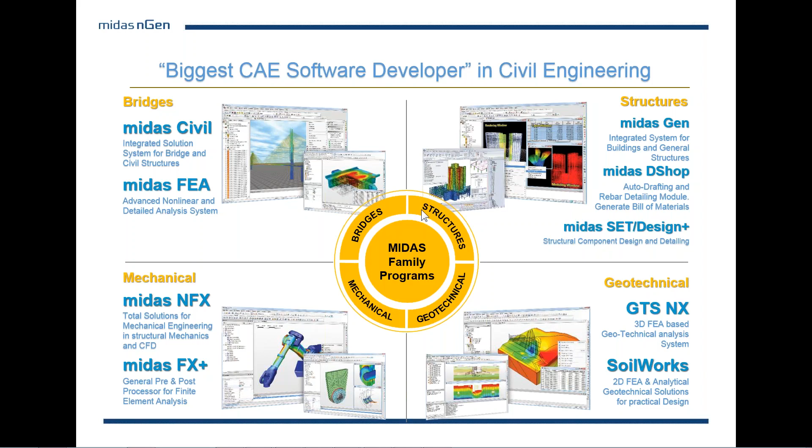Let's go ahead to the Midas nGen introduction now. Midas nGen is the next generation solution for building analysis as well as design. Basically, Midas nGen consists of the analysis tool, the design tool, as well as the drafting tool - it's a one-stop solution for buildings and general structures.

We start with architectural drawings, which are integrated into Midas nGen software. We can create a model easily using those drawings, and after that perform the analysis. There are a lot of automated features in Midas nGen that can be taken advantage of. We have optimized design solutions, and high quality reports can be generated, including quantity takeoffs like bill of materials, as well as structural drawings. So we basically start with a drawing and complete with a drawing, making Midas nGen an all-in-one design system.

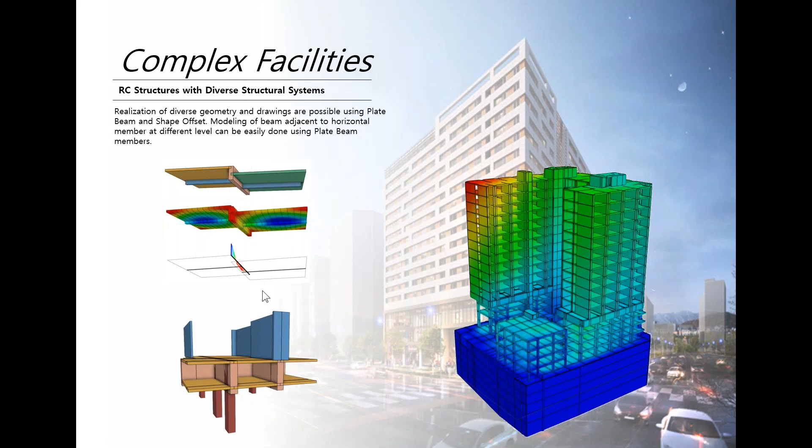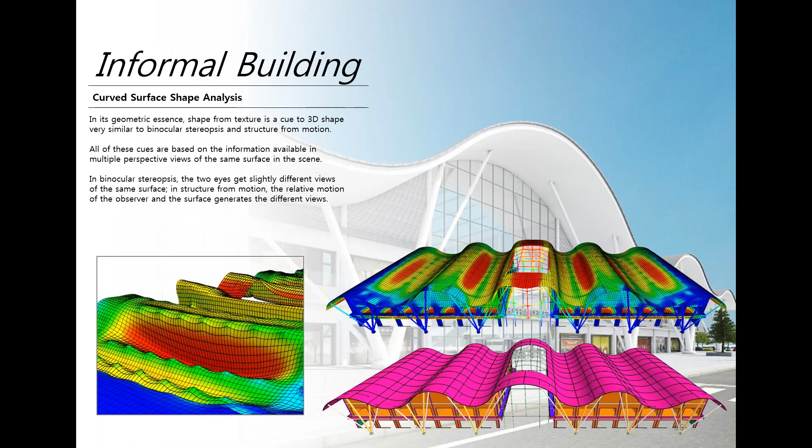Multi-towered structures can also be modeled, where each tower will have its own diaphragm. Then there are informal buildings, as you can see here, with shell type elements, and the modeling is quite corrugated. We can easily model that using automated modeling features. Again, here we can see a shell member analysis performed of a cooling tower in Midas nGen.

So not just RC, but also in the field of steel, we can see steel frame design. Optimization is also possible in Midas nGen.

Let us go ahead now to the demonstration. I would like to show you how Midas nGen can be utilized easily. So let me go to the Midas nGen software solution.

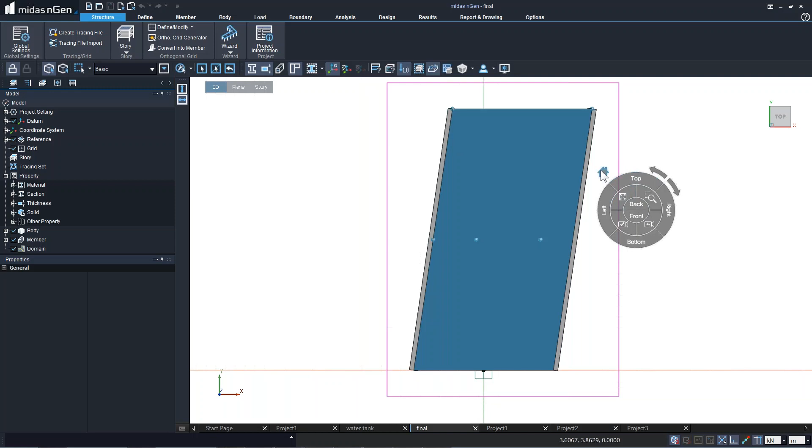We can access the different viewpoints by clicking on the second button of our mouse. So it's very easy to go to any view at any point in time, wherever our cursor is. So that's about the user interface.

This was another session where we had seen how a big model or building model was easily modeled in Midas nGen. Today we are going to see how to do the modeling using one of the modeling features in Midas nGen, that is the tracing of architectural drawing.

In Midas nGen there are various ways in which we can create a model. I'd like to briefly explain those different ways. Let me first save the model file before I continue. We have an autosave feature.

One of the modeling features in Midas nGen is the importing function, where we can import MGT files like BIM tools, Revit, Tekla files into Midas nGen. STAAD files can be imported, parasolid files, DWG or DXF files can be imported in Midas nGen to create the model file.

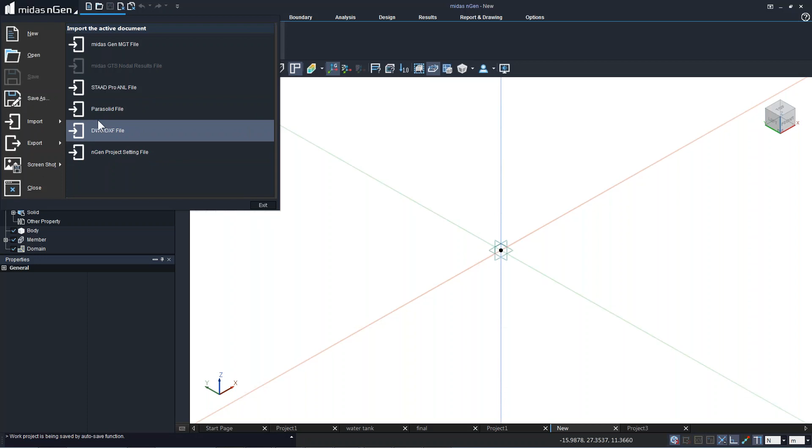The second method of modeling is using tracing file import. You can trace the architectural drawings in Midas nGen.

The next method of modeling is using grid lines, so we can start defining grid lines. Unlike our earlier software, Midas Gen, in Midas nGen we can have a 3D type of grid line. So you don't only have a grid line for the floor plan, but you can also have the grid line for the upper stories at the same time, along with the columns and shear walls.

We can actually create the entire model, all the stories at the same time, using this 3D grid line. Further, we can directly start creating our members in Midas nGen using the member tab. Another feature is the body tab, which is simple drawing or sketching. We can sketch our entire model and convert the lines or planes into members. That's the body type of modeling in Midas nGen.

So these are the 4 methods of modeling, and in today's webinar session I would like to show you how we can do the tracing, which is the fastest and most interesting feature in Midas nGen software solution.

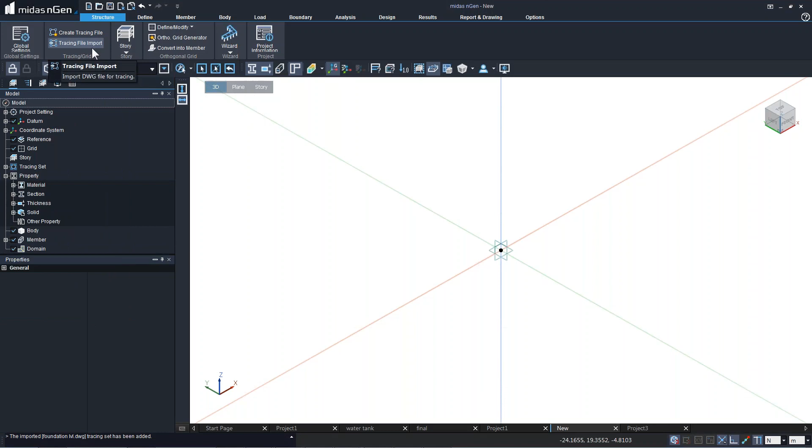Once the architectural files have been imported, we can go for the story definition and start defining a set for the story. Basically, in case of multi-towered structures, we have multiple sets of stories. Right now I'm just creating one tower.

I'll start with 3 numbers of stories, and they'll have 4 meters height, floor to floor height. From here we can also modify the floor to floor height, and we can modify the floor to floor height at any point of time during the modeling.

Right now I'll put up the tracing file data. So we've got the foundation level on the 1F, and the 1F level over here, and further we've got the second level over there, and this is going to be our roof level. It will again be the 2F level that we'll be taking, but we'll also be doing some copying of our floor plans, just as an example of how we can do that.

So we can create our stories at the beginning. We can also create the entire building first and then automatically generate the story data. So we have both options.

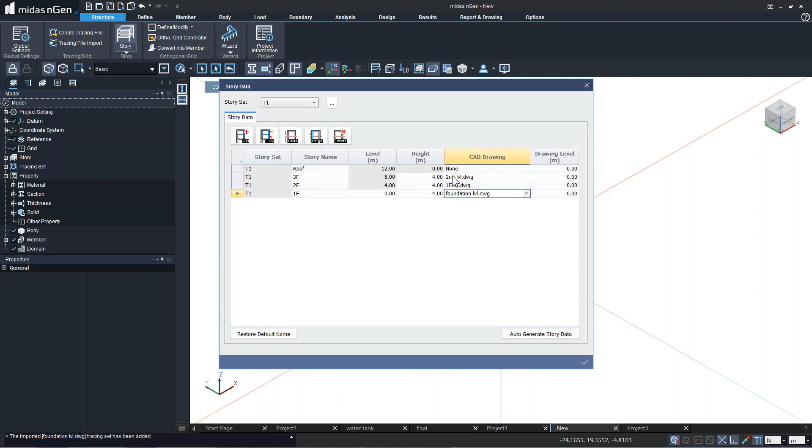So in case of stories, story tracing, we need to create the stories, and the tracing can be done in the story tab. These are the three modeling tabs that we have: 3D, plane, and story.

3D will be able to access all the three-dimensional members. In plane, only all the members lying in that plane will be accessed, or we can work on them. And story is based on that story which we have selected from here, so we can work on that story on that plane itself.

So for tracing, we can directly go to the member, and we can start with defining the column members. In Midas nGen, we have an advantage of tracing, which means all we have to do is select the material property. This is C30/37 European code used material property that has been predefined by the program, which we can of course modify at any point of time.

So this is where we can see this material property which can be modified. That's, let's say, C25/30, and we can see here the modulus of elasticity information, elastic information of our material, and strength for design also we can see right over here. And for damping, for dynamic analysis like response spectrum analysis, we can choose to get or change the damping ratio. Right now by default it is 5% damping.

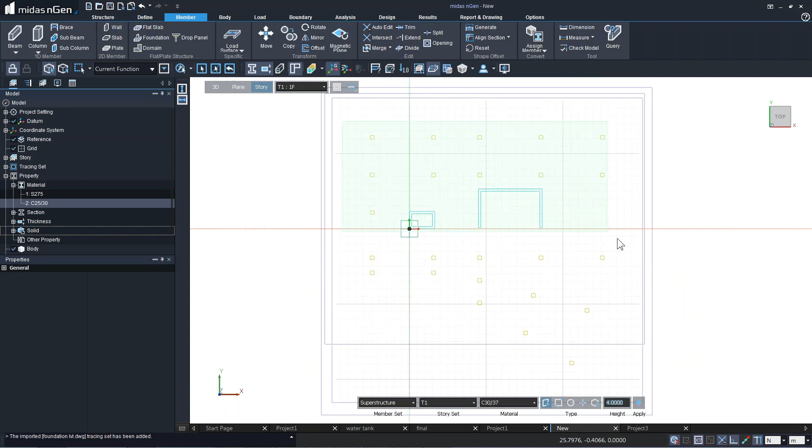So C25/30 is the material model that I'm going to be using, and further we will be tracing our columns which we can see from here. I simply drag around these boxes and the program automatically understands.

Of course, it is based on the layers that we have used or selected. So based on the layers, the program is detecting the size of the column, and over here you can see there are some predefined sizes. However, after I click on apply, the program will automatically assign or generate a new property having the size of 500 by 500.

We can have many different sizes, and we can see here how the program has generated all the columns. It's that easy - simply drag to select all the columns and click on apply, and all the columns are generated. Similarly, we can do that for the walls.

Here again, there are some thickness properties predefined by the program. So if I delete these properties, this is just to show you how it's done. Again, when it comes to walls, we have got three types of walls in Midas nGen. In Midas Gen program, we have just two types of walls.

So those two types, membrane type and plate not mesh type, are available in Midas Gen. But in addition to that, in Midas nGen, we have plate mesh type of wall element. This plate mesh type would be really useful for irregular shape wall structures, whereas wall plate not meshed and wall membrane would be for rectangular type wall elements.

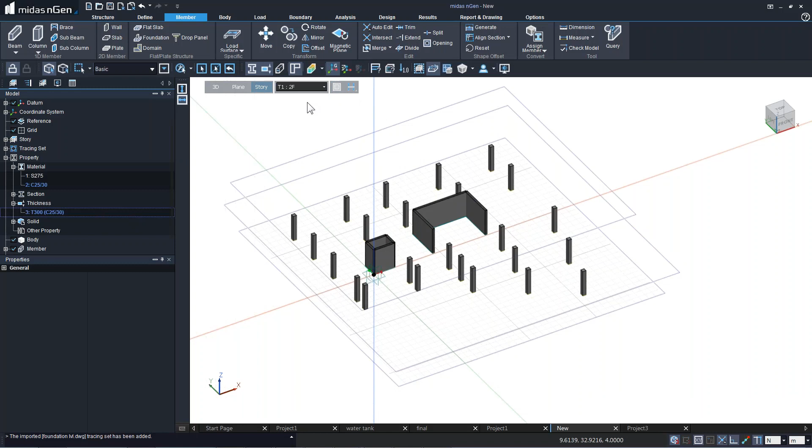Now I'll go ahead to the 2F level. In the 2F level, we can see that there are some grid lines. Using these grid lines, we can create our beams, and we can also generate these slabs over here.

When it comes to slabs, there are different features in which we can create the slab. There is slab using 2 points, that's rectangle. There is by draw and by select. So basically the by select option could be used when we have got body type of elements, which can be imported from a DXF file in Midas nGen software solution.

Again over here, slab can be of two types. Slab can have in-plane as well as out-of-plane bending, and only in-plane bending can be taken for the slab membrane type. Right now I'm going to make use of slab membrane type over here.

That's one of the features, and we can start drawing the slab. So this is actually a flat slab, so I think I should make this into slab plate out type itself. Using these lines, I'm just going to simply create my entire slab.

So basically, I'm going to be clicking over here to make the entire flat slab in one go, in Midas nGen, or rather in the Midas Gen program. One second. And the last point, let me close this window.

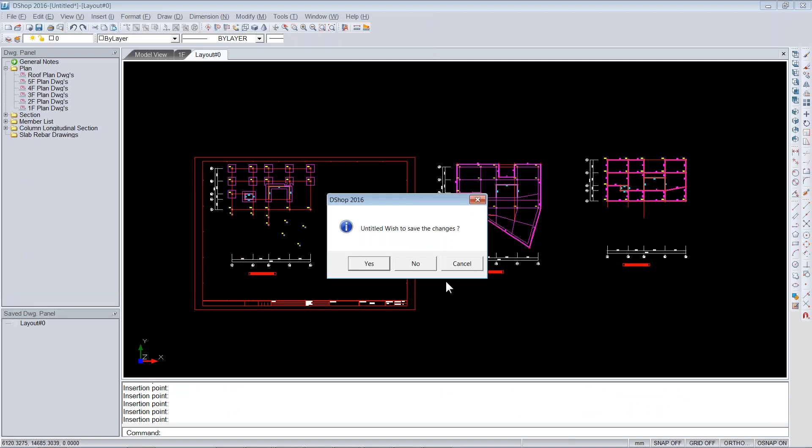This is orthogonal type, that's why it was going straight down. It's a little similar to AutoCAD. So very easily I'm able to take the pick points from the tracing file that I had.

After that, over here I have got T300 as the thickness property. So I can simply add another thickness property of let's say 0.2 meters, using the material property of C25/30, and I'll use that one over here. So very conveniently, I'm able to create my entire flat slab.

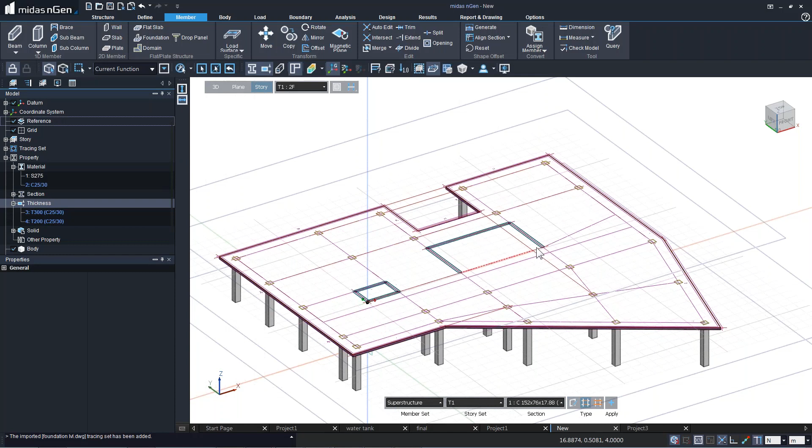You can see that it's generated. On top of that, I know there are going to be locations where I have beams or openings. So when it comes to beams, we can simply go to the beam and click by select, and select a line segment from the grid line that we imported for tracing. It's selected now, and we can select one of the section properties. So I'm selecting 400 by 600 and apply. Here we have got the beam generated for our particular lift wall or lift well section.

Here I would like to create some openings as well. For creating openings, we have got this opening function. Openings can be generated using the periphery beams or periphery body lines, or we can make use of the by draw feature. Let me go to the top view. So by draw feature, I'm going to simply click on the locations.

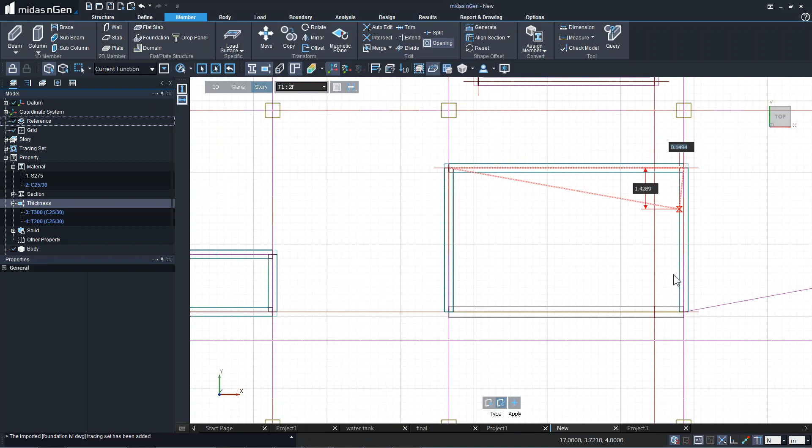That have already been provided with the help of the tracing drawing file. Same thing I'm going to do on this side. These openings could be in any form - circular or rectangular, not a problem. So we have got openings over here and we have got slabs as well. This is one way in which we can create the flat slabs and flat slab structure.

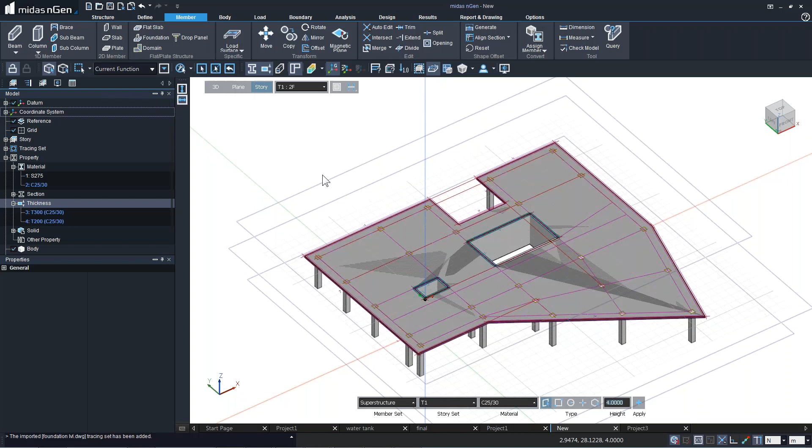Let me go ahead to the tracing of the columns and shear walls at this floor level. Again, I'll be simply making a box around the entire floor plan, and that'll be applied. Next, I'll take the shear wall. Again, for the shear wall, I'm going to be tracing the lines.

So here we have got this information, and let's go on to the next floor level, that is 3F level, to create our beams on the upper level. I'm going to be creating beams having 400 by 600, material property C25/30, and we will use by select segment. So here I'm going to be simply selecting these lines.

Even though in AutoCAD these lines are going completely from one direction to the other direction without getting intersected, even though it's like that, in Midas nGen we can see them intersected. We can select them by intersecting. So I'm not going to be using this one.

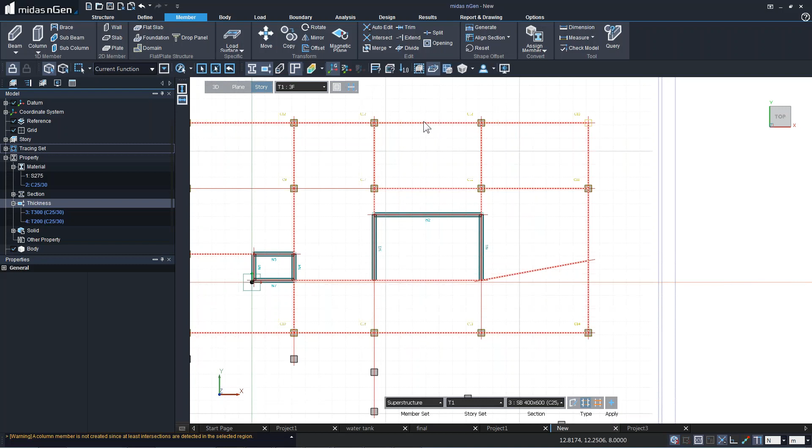So I can select these ones, which are not going to be of use. Let's click on apply. Sorry, I think those got unselected. So you can see these beams are just getting applied.

Also, beams can be created using 2 points, so that's also another feature. Also, we can have our walls created using 2 points.

Okay, on this floor plan, basically, I do not want all of these columns, so I think I'll be deleting these columns. I'm simply going to select them and press delete from my keyboard. So I'm selecting this one, last one, and okay. So I have got this floor plan.

Now in Midas nGen or Midas Gen software solution, we have got this option to either create the slab elements or not create the slab elements. So we have both options over here. In Midas nGen, let me show you over here. This is the floor plan, typical floor plan for upper stories.

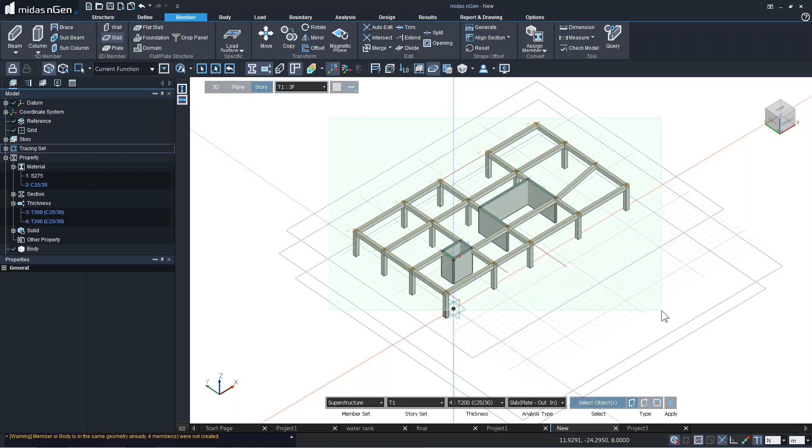For this case, I can select the slab and do the tracing now over here using the beams that I have. So I'm selecting likewise and apply. These openings can now easily be created by simply selecting these slabs and deleting them. So we can create slabs in this way.

Or let me go to the 3D type, and we can also choose not to keep any of these slabs. So if I just remove this slab right over here, I'll show you how we can apply the loads if we do not create any slab member at this location. However, if we create a slab member at these locations, we can perform the design as well.

Alright, now to create multiple number of stories, we can go back to the structure and story definition, and over here we have the options to add new stories. So let's say I want to add 2 more stories and I want such a replication done for the 3F level. Basically we can see the preview over here of what we are adding. So 2 stories, replicate, and we have 3F level.

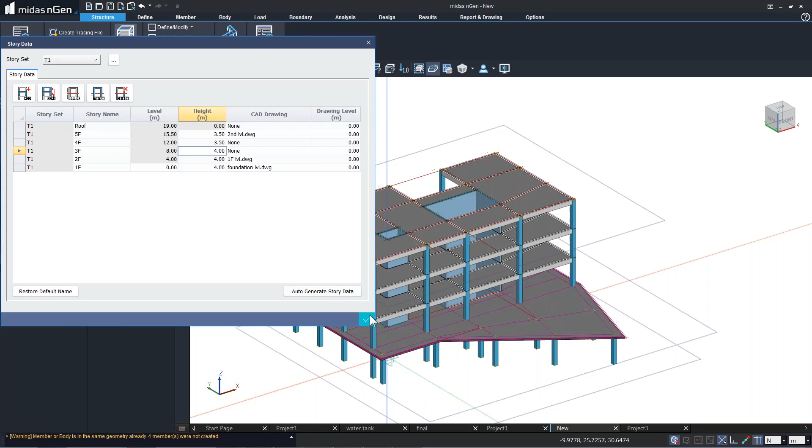So this 3F level is going to be inserted likewise. We'll click on apply. As you can see, there are more stories that have been created by the program, and we can now simply change the names and heights. For example, I do not want 4 meters as the height here, I want to change it to 3.5. So I'm selecting 3.5 here as well, and I'll click OK. The height has automatically modified.

Alright, so that's about how we can add or delete different types of stories or different stories at different levels. Okay, so that's one thing. Next, one more thing: this story, this is not required, this story data only can be deleted.

So we have got some story sets which I would like to show now. We have display features in which we can check this information and see the different story levels labeled. I'll go to the front view for a clearer view. Different levels can be seen here. Also, we can generate grid lines out of this.

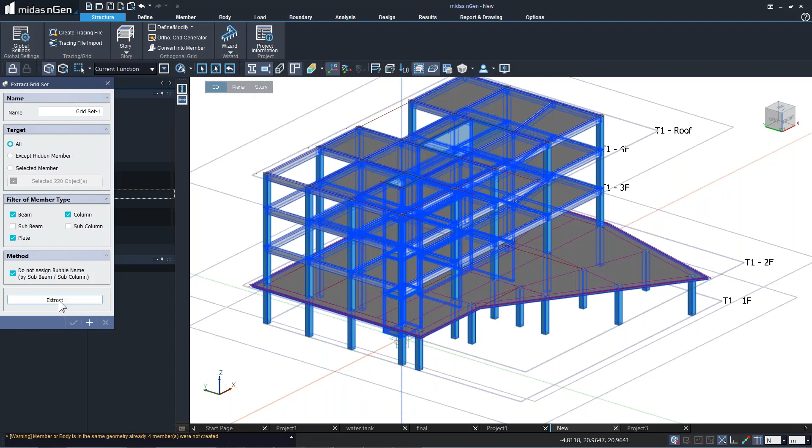There is structures, and then there is ortho grid generator. So we can select our entire structure from here and say extract. After extracting, we click OK. Automatically grid lines will be created and we can see the elevation of each grid line from here: 0, 4, 8, 12, 15.5. Likewise we can see. So story, let me check.

Yeah, the height here also should be 3.5. Okay, so we can see here, okay, that's changing this roof level over here. Completely. So the height's been changed.

The height of the stories are changed, but the grid lines height will be the same, that's why we are not able to see any difference. So let me go to the front view. Yeah, now they are at the same height. So basically the grid lines have been extracted from the earlier model, and that's why they are at the same level. If we would like to modify these grid lines, again we can extract them and delete the previous grid line that we had created. Alright, so this is how we have generated the entire building.

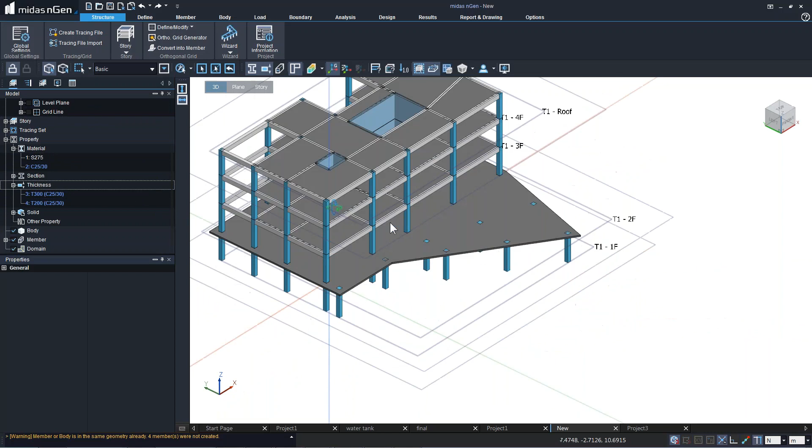I'll just undisplay the grid lines, and there are lots of references as well and tracing sets. So we have got different tracing files, I'll just undisplay those. Display and undisplay is very easy in Midas nGen, you just have to check on, check off. Alright, so here we are done and we are good to go ahead to the next part.

So that's about modeling, let's go to the loading part. In the loading part, we have self-weight. Over here in the self-weight, we do not need to create load cases, so we can get automatic load case generated for the self-weight. However, for the live loads and the dead loads, or superimposed dead loads, we can go ahead and create more load cases. So one I'll add for self-weight and another for superimposed dead load.

Then the live load. In Midas Gen software solution, we had to create the load cases for the wind loads and the seismic loads as well, but here the program can automatically create those. So little by little, time is saved by the automated features in Midas nGen software solution.

So self-weight I'm applying, we can see in the analysis tree menu that the self-weight has got applied here under the dead load, load set and self-weight. Next I'll go ahead to apply the pressure load as well. Let's go ahead to the slab loads. We have slab load in which we can apply the superimposed dead load and the live load. So superimposed dead load, let's say it's minus 1000 Newton per meter square, and for the live load minus 2500 Newton per meter square. That's one type. We can add multiple types of slab loads and apply them at the same time on the selected slabs.

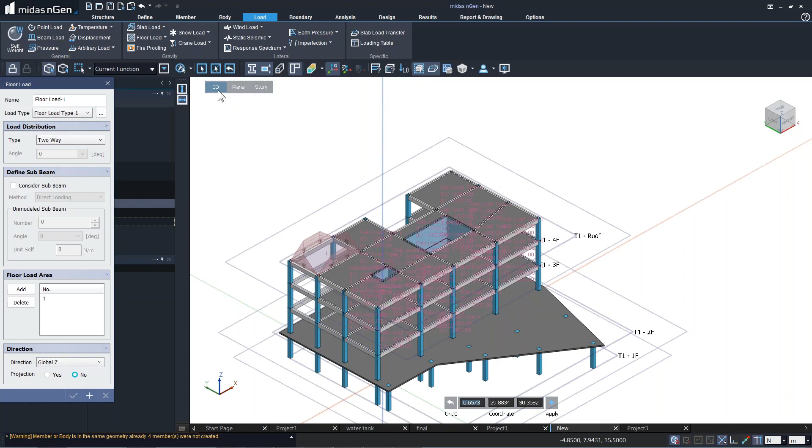So now is the time to assign these floor loads. Again we have got this two-way or one-way type of load. By default slab loads are two-way type, but we can modify them as one-way type, so I'll show you that as well. In case of two-way load we can have sub-beams, but I'm not considering those as such. Now we can simply go ahead to add. Adding is very easy - we can simply select the edges in this way and apply. So it's that easy, and we can go to different planes to do that.

So, floor load, add over here. The program automatically detects the beams that are adjacent to it. And again, I'll be going for the floor load over here, adding them like this, in this way.

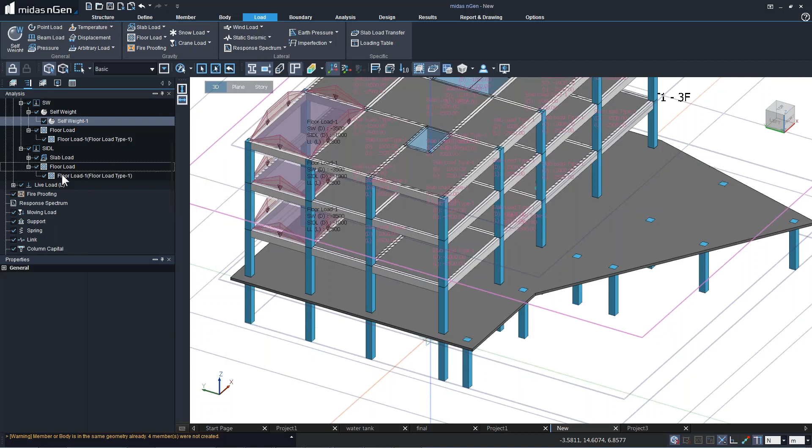Then further for this case, as well as this case. So all three areas are selected and two-way type of loading is there, and then we can click on OK. In this way the floor loads have got applied, and we can see the floor loads have been applied for self-weight, for superimposed dead loads, as well as for live loads. Okay, so that's how we've applied the loading, floor loads and slab loads.

Now let's see the automated feature, that is the wind load function. Wind load we have as per the European standard as well as British standard BS 6399. Since you're shifting to Eurocodes, I'll be demonstrating the Eurocode information.

So over here, let me begin with the assignment first - assign wind loads, wherein we can choose that our structure is a storied building, and then choose to apply at the X and Y direction at the same time. The eccentricities we can choose to keep none, positive or negative, and further the design wind loads. I'll add the design wind load for Eurocode, and average roof height is automatically taken by the program. Terrain category, orographic effects, we can simply expand and provide that information. Then raising of displacement height, if any. Then structural factors - this can be automatically calculated by the program if you have the natural frequency of the structure. I'll keep it as 1.

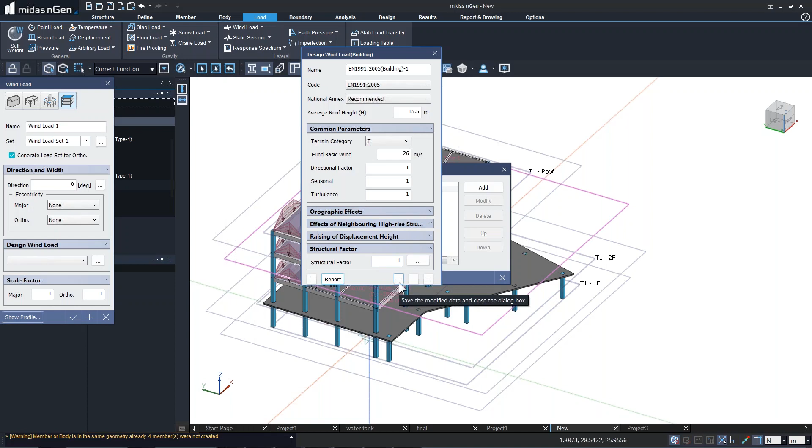Before that, we can also generate a report, a Word file report of the calculated wind loads, so it's not a black box - we can actually understand how the calculation is done. There's another difference between Gen and nGen: in Midas Gen a text file report is generated, whereas in Midas nGen a Word file report is generated, a little more sophisticated. I'll click on OK, and we can see the profile as well before applying story forces, and we can click on apply. So in this way the wind loads have got applied.

Similarly, I'll go ahead to the static seismic load. Story based static seismic loads - again we can select none and move ahead to creating the design function. All the parameters will be automatically provided, or we can provide them, and also calculation of the approximate period can be done. Report again over here can also be generated for our seismic load calculations in the Word file report format. At the same time we can apply the earthquake in the X and Y direction - major and ortho at the same time. So that's what has been applied, and as you can see here, the load sets have also got automatically created.

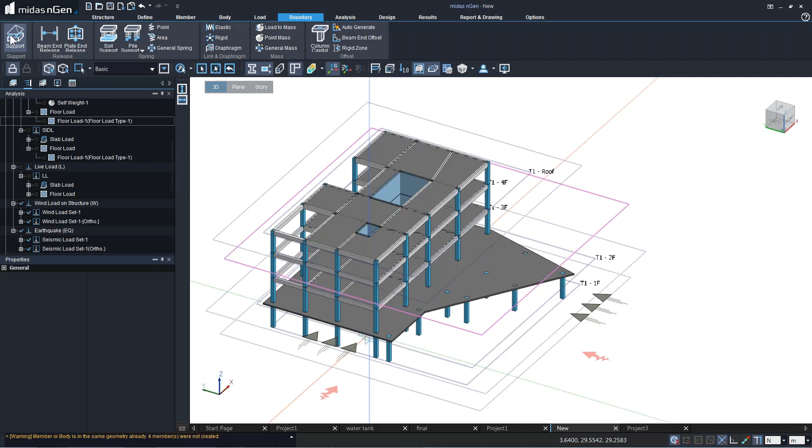So let's go ahead now to the boundary conditions and apply the supports to our building. I'll go to the front view and select the bottommost nodes of the foundation level, and click on apply. So our foundation or support conditions have got applied, loads are applied, and now we can go ahead for the analysis.

In the analysis, we can actually take control of the meshing that can be performed for the slabs which are irregular. Then there is analysis settings over here, wherein we can take care of the mesh size of our 2D and 1D elements.

Meshing can also be controlled by us.

Next part is about the load combinations, which can be automatically generated as per the Eurocode, or we also have got British standards available for performing the analysis and design. So there is Eurocode, which I'm going to be using in today's session.

So here we have got an auto generation feature, wherein the fundamental, accidental, seismic, characteristic, fundamental, frequent and quasi-permanent type of strength and serviceability load combinations would be automatically generated. Along with that, the envelopes are automatically generated by the program. So that's fundamental and seismic available, and characteristic for serviceability check, frequent and quasi-permanent type of load combinations are also automatically generated.

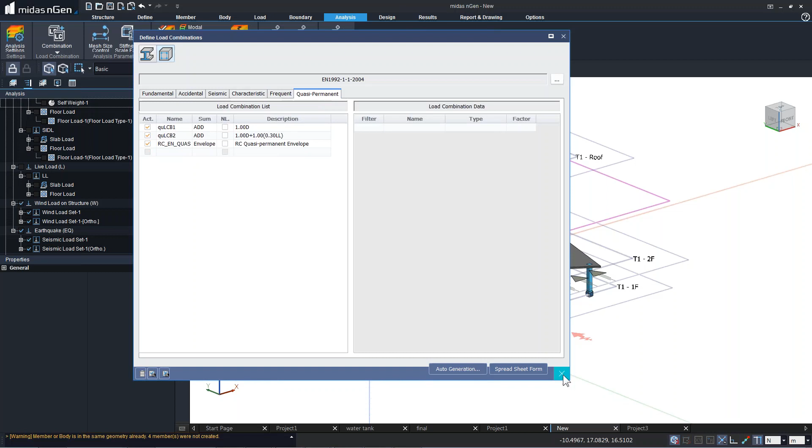Now we can go ahead to perform the analysis. In Midas Gen program, the older general software solution, we could only perform one analysis at a time. But over here in Midas nGen, we can create as many analysis cases as we want. And in each analysis case, we can choose to include or exclude any part of the structure, any support condition, or any loading condition. So that's a very big advantage in the Midas nGen software solution.

So I'm creating right now one analysis case which includes everything, and I'll click on OK and go ahead to perform the analysis. We can choose if we want to run one analysis or we want to run all the analyses at the same time.

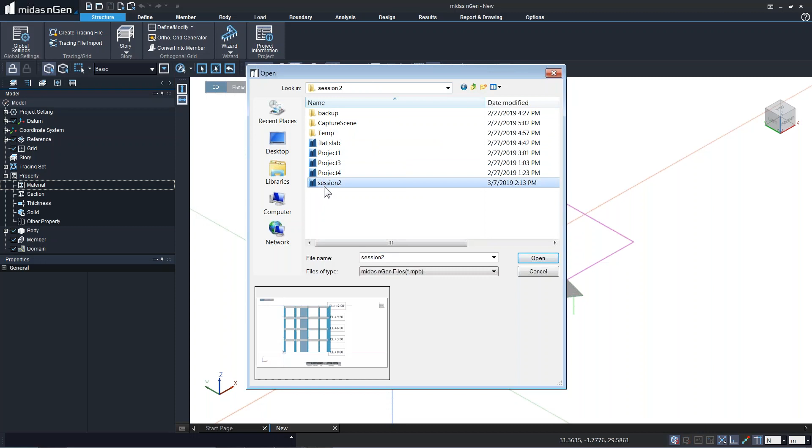Okay, due to technical issues, the project was not saved. So it would take actually a long time right now to assign everything again, define and assign everything. So I'll be moving to another model file. This is another model file that we have over here, and we will be using this for checking out the analysis and design results and the report generation.

All right, so let's move ahead to the analysis part. Let me check in this model if a case has already been created. So we can see from here there is an analysis case already created. So let's solve this analysis case.

There is also modal analysis available or applied over here, eigenvalue analysis basically.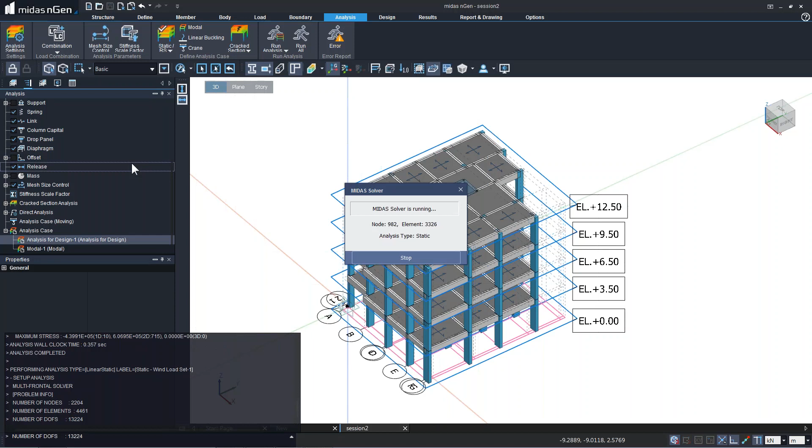Over here we can see in this message window if the analysis is getting any errors or warnings, and in the end another dialog box will come up so that we can understand what kind of error is being put up. The analysis speed of Midas Gen and Midas nGen is the same. We have 64-bit solver speed and GPU accelerator to quickly finish the analysis.

Alright, so the analysis is completed, and now we can check out the analysis results in the results tab right over here. So we have this results tree menu as well. Analysis results can be seen over here for different static load cases, and load combinations are also generated.

So we can see the results for different load combinations like deformations. So this is the deformation, and from here we can check the deformed shape to see the deformation of our deformed structure. Let me undisplay the grids for a better view.

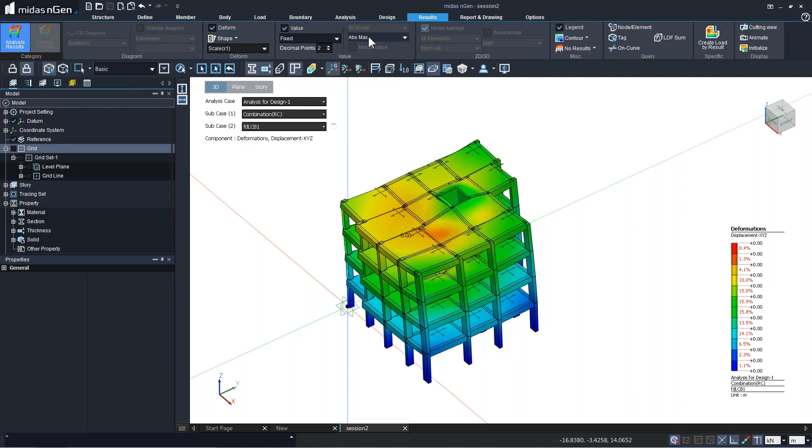And we can also look at the value. The absolute max value will be shown over here. We can change the unit system at any point of time. Right now it's in meters, we can change it to mm. So 0.91 mm is the deflection or displacement value.

This is for the first load combination. We can see over here there are various load combinations and envelopes from which we can select and look at the result.

Further, we can see over here there is a legend. So in this legend, if you closely look, which we can move anywhere, basically we can see how much percentage of the structure is lying in this value of displacement. So we can get an overall idea.

So that's about the analysis results, deformed shapes, reactions. So these are the vertical reactions. Again, instead of the absolute max value, we can see all the values on the screen.

We can also look at the applied forces on the structure, beam forces, and the axial force diagrams for columns. In case of beams and columns, we can go for the bending moment diagrams. Let me display the deformed shape and load values on the screen.

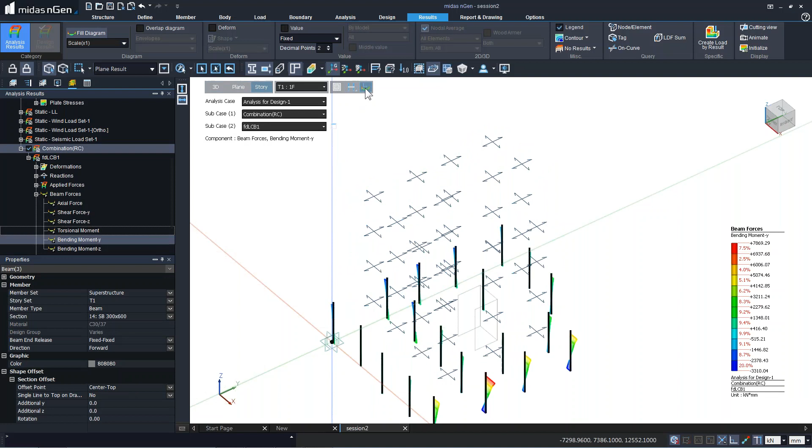If you would like to look at the results for one plane at a time, we can simply choose to activate one plane, but for that we need to define a plane at the beginning. We can go for the story option - stories are there, and we can choose to see only the upper entities or lower entities. Let me go to 2F or 3F level, so we can see lower entities and upper entities at the same time. That's about the bending moment diagram, or the diagrams for line type elements.

Then further, for the walls, the shear walls, we can look at the axial forces. Let me go to the 3D view and we can see the entire structure, the shear wall results for the entire structure, and values can be seen at the top and bottom of every shear wall. So that's about the different results. Also, we can see the wall forces and stresses, beam stresses, and plate stresses.

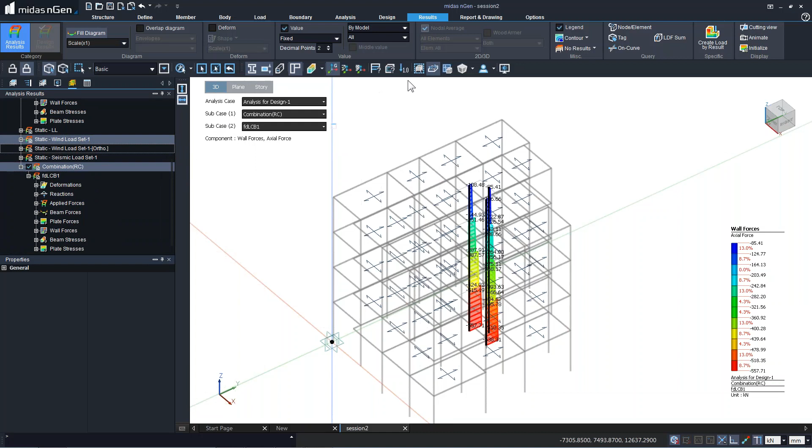So let's move ahead now for the designing part. In the design part, we can see the design settings, which help us set up the code, the standard. We can set up the reinforced concrete factors and set up the rebars, because Midas nGen or Midas Gen, both softwares can provide us not only the area of reinforcement but also the arrangement of the reinforcement. We can select which standard we want, of which the rebars are going to be, and the grade for the rebars.

The rebar arrangements can also be set up from here - which diameters of bars you would like to use and what kind of spacings are to be utilized for the stirrups, as well as in case of slab drawings, not just drawings, but the slab analysis and design results.

Checking control is available over here that can help us provide a target ratio for the design. Right now the target ratio is kept as 1, but we can change it to 0.9 if we do not want to make it too close to 1.

Then further, we can also check the economy of the structure with the help of criteria for strength status. From here we can see 'OK' - meaning the demand capacity ratio is above a minimum value of, let's say, 0.6 and below a maximum value of 0.9. If most of my members come under this OK status, then my structure is economical. If it is 'need check', then it is highly uneconomical, as the demand capacity ratios are going below 0.6.

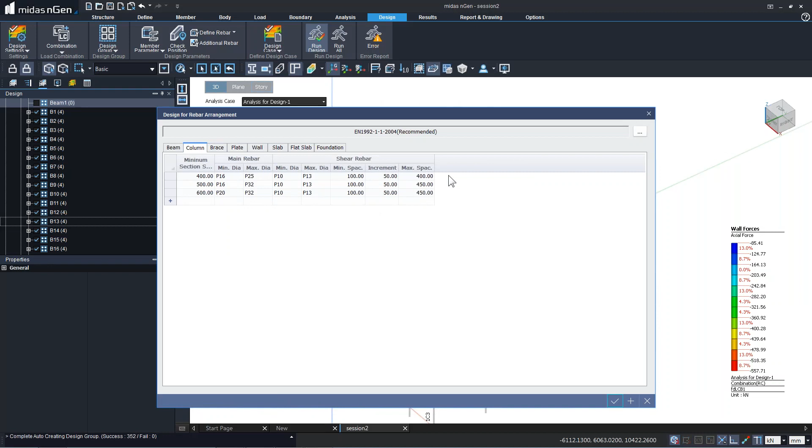If you would like, we can modify this auto rebar arrangement from here as well. Depending on these diameters, minimum and maximum diameters, and the spacings, the program will provide us with the design result. So by the default design parameters, or design criteria given in the program, the design is taking place. Let's see that.

The design is completed, and now with one glance we can understand how economic our structure is. Most of our members are in the OK field, meaning all the beams, columns, and slabs are passing and within the target ratio limit. We can see some parts which are critical, going above 0.9, but still passing because the ratio is coming to 1 or below that. So that's the result we have.

Now let's look at the design results. For this beam right over here, we can check out the detailed design report generated by the program. So I selected a beam, I'll select one slab, and I'll select one column as well. Let's go ahead and check out the design result.

Of course, wall is also there. Sorry, I forgot to select that one. But the idea is to understand how the detailed report is generated by the program.

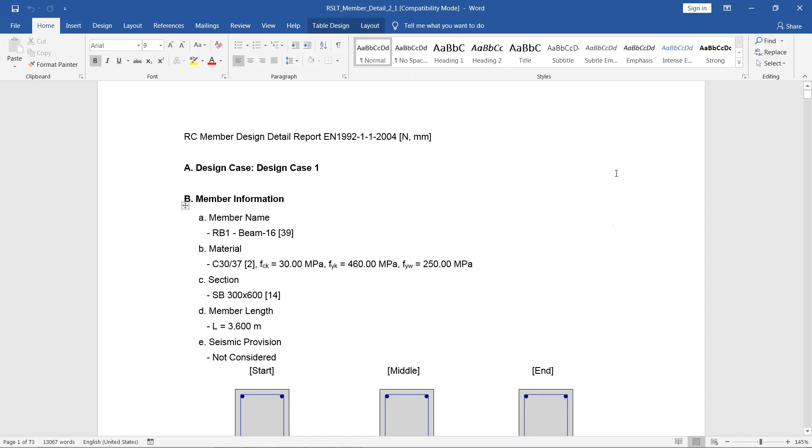In Midas Gen program, this detailed report is generated as a text file. In Midas nGen, it is directly in Word file format, so it's pretty sophisticated. We can see here addition of images of the arrangement that the Midas Gen text file lacks. We have included that as well in the Midas nGen software solution.

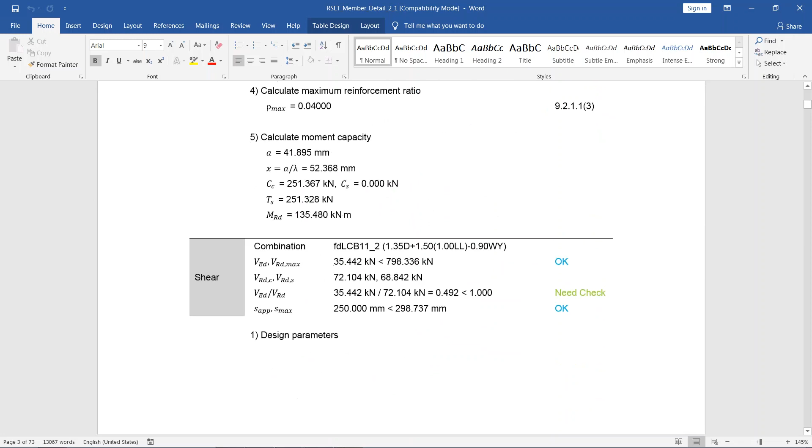We can see here detailed calculation, all the formulae as per the standard, and references as well given by the program. So there is a need check, okay, such kind of status provided by the program directly. All the equation references are provided over here.

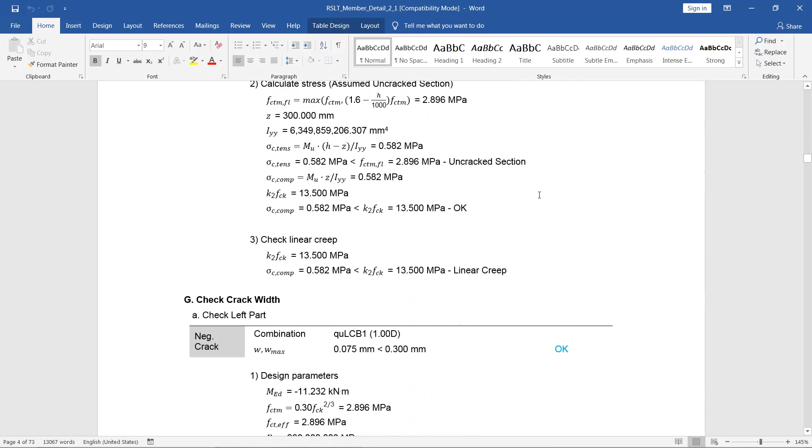So that's about the beam, and similarly in the same Word file report we can get the result for the columns. Let me just move ahead. Yeah, so this is now for the column, and in case of column we can get the PM interaction curve as well.

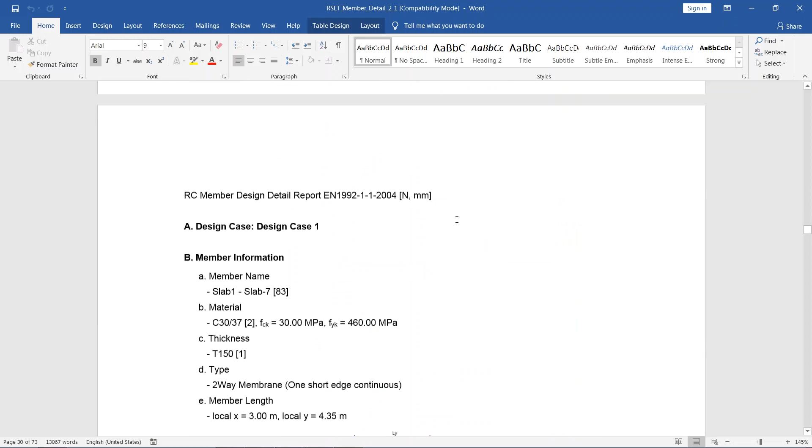Slenderness ratio is checked, and if slender, then additional moments are added. We can also see that stress checks are done by the program for beams as well as columns. Long-term stress check and long-term deflection check are also done.

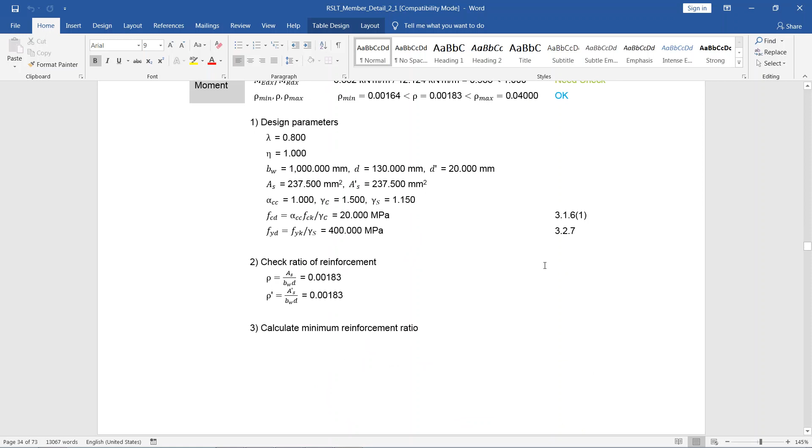Now this is the design for the slab. Slab design is also available in the Midas nGen software solution, based on the conventional design method. In Midas Gen program, we designed based on Wood-Armer moments, which is based on finite element results, whereas this is based on the conventional design method.

So that's about the detailed design report generated by Midas nGen software solution for RC beam, column, and slabs. We can also see at the same time the result for the wall element. I'll just quickly get to a summary of the wall element right now, and of course the detailed design report is generated the same way we saw earlier for the other members.

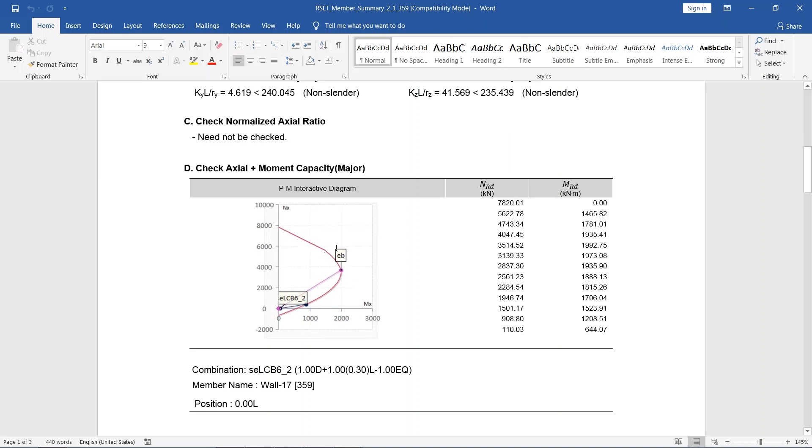So these are the end rebars that have been provided, and this is just a half image of our wall, and this is the PM interaction curve, so we can get some more summary of the wall design. That's about the design report generated by the program.

Now let's move ahead for more reports that can be generated. But before going there, I would like to also mention that the program is able to provide us the reports or the reinforcements in the form of tables as well.

So if you would like to check the rebar information in the form of a table, we have some options over here, like RC section, where we can see beam, column, walls, slabs, and view in the form of a table what reinforcement is applied.

In this dialog box itself, we can choose to modify the section's shape, modify the diameter of bar, and ask the program to further check the design with the given reinforcement. So you can probably increase the number of reinforcement, and you can see it becomes dark or bold in color.

And now you can further go ahead and redesign for the checklist. So now it has redesigned and it is giving us the result, and this is the ratio. It's actually smaller than 0.84, but it's an approximate or rounded off value that we can see over here.

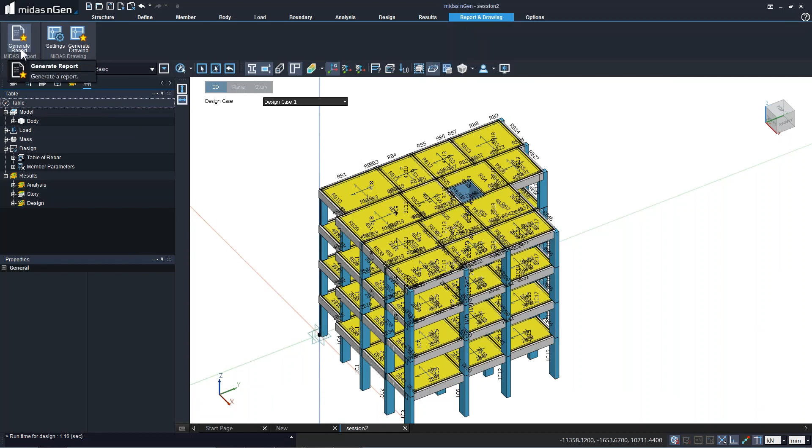All right, let's move ahead to more reports that can be generated by the program. Here we have a dynamic report generator in Midas nGen. This is a little different than Midas Gen software solution, a bit more sophisticated. So let me make a new file over here. This is the report maker in Midas nGen software solution.

Basically, what we can do in this case is link our Midas report maker with Midas nGen, and then we can move to create the report. So right now the link is done. Alright, so how to create this report is simple.

We just have to drag and drop the items from this item list and put it in the report board, and we can generate chapters over here, sub-chapters or subtitles, and put in the table of contents and so on. Further, we can specify what type of images or tables should be included. Here we can say add a chapter, and we can name this chapter as well.

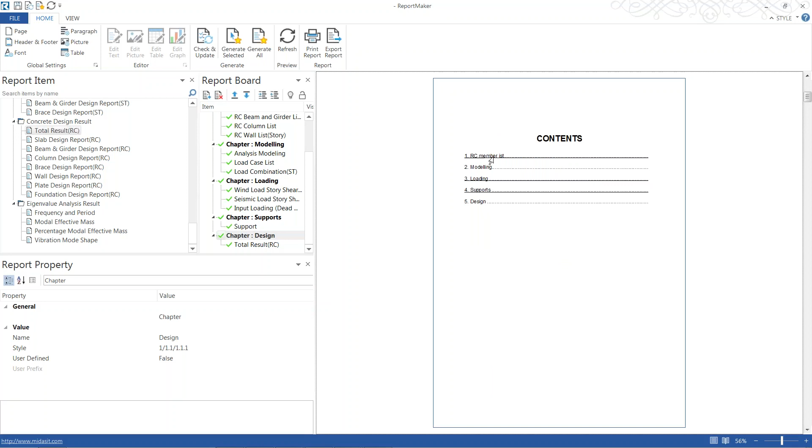So this report maker generates the entire project report. As you can see here, the initial image is automatically taken by the program. Then we can see the table of contents, showing what chapters we have in this project report, automatically done by the program, along with the RC member list.

Further we can see more information on the loading, modeling, the analysis model, the load cases, load combinations, and the loads that have been applied, story by story. For support conditions, both image format and table format of the report have been generated.

Coming to the design, we can see the total design result that the program has provided. You can see if it's okay, critical, not good, or failing, likewise. So it becomes much easier to give a brief or a detailed project report.

This project report can be further saved as a Word file. We have to export it as a Word document, and it can be exported to any given location.

The good part about the report generators in Midas Gen as well as Midas nGen is that if we make any change in our model, run the analysis, run the design, we can simply regenerate the entire project report with just one click. Let me show you how everything is interlinked.

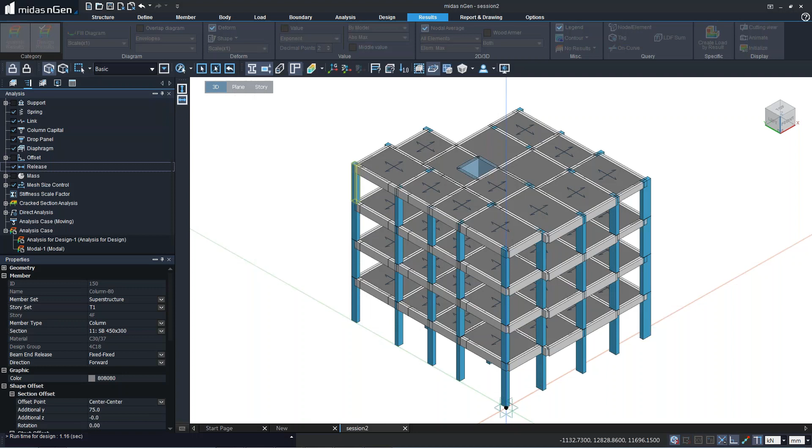So if I just delete this column right over here, let me go into the pre-processing mode and delete this column. After that we simply go to run all, design, rebar arrangements, and everything.

So everything is right now modified. All the analysis results and design results will be modified. Reanalysis and redesign will take place. In the Midas Gen program, we had to first perform the analysis, then go to the design tab to run the design. Here, in one click, we could run the analysis as well as design, so it's very fast and convenient.

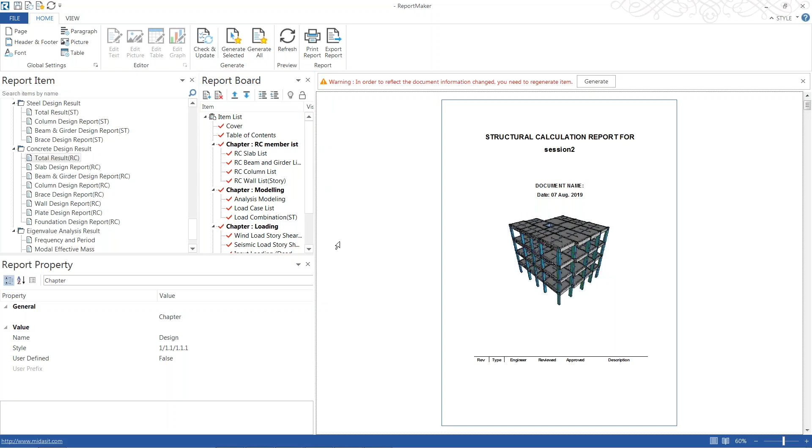So the analysis and design has been completed. Now we can go back to the report maker, refresh over here, update the entire data, and regenerate the entire project report.

So now you can see one of the columns is gone, and the entire report is again modified likewise. Just by one click, the entire project report will be automatically modified. You can also put in your own paragraphs with your own information. So that's about the report maker.

Let me show you about the drawings that are generated in Midas nGen now. I'll be using Midas Drawing, which comes along with the Midas nGen software solution.

Midas Drawing has recently gotten really updated with the addition of longitudinal reinforcements for beams, columns, as well as slabs. Let me go ahead and generate the structural plans first. The program will generate all the drawings required for this entire building model.

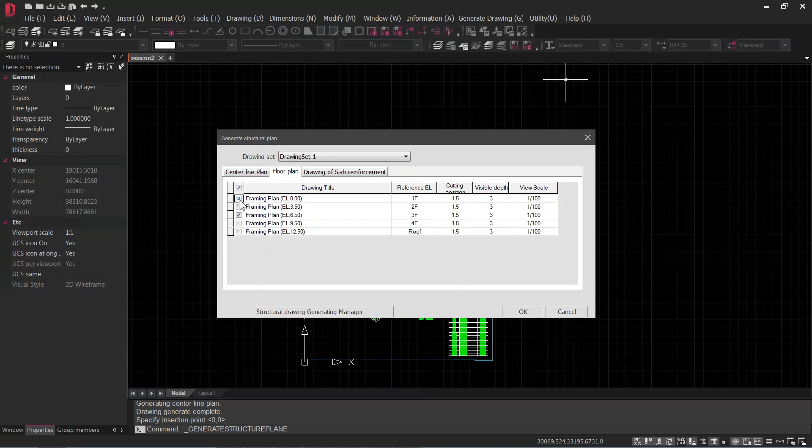All we have to do is simply select different floor plans that we would like to generate drawings of. So let's have one for the basement, one for the typical floor plan, and click OK. Two of the floor plans will be generated, and I can space them likewise.

So this is the foundation level framing plan. At the 0,0 level, all the columns and shear walls are shown, as well as section properties and wall thicknesses.

This is the third level, or sorry, 3F level at 6.5 meters. We can see the beams, columns, grid lines, and section properties for every grouped member. This shows the sophistication of these structural plans. Settings of font sizes, marks, colors, and everything can be done in the structural drawing settings.

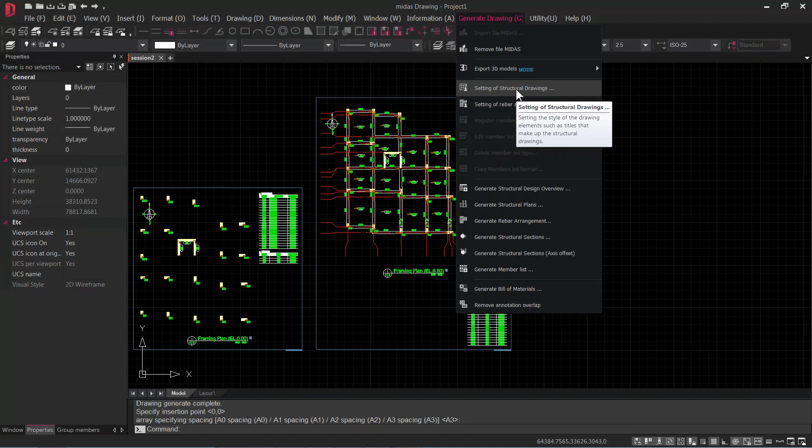Once these settings are done, you do not need to modify them again for your future projects. So instead of starting from scratch, you can just directly go ahead and generate the drawings. So that's about the structural plan. I'll go ahead to the next part, that is generate rebar arrangement.

We have got longitudinal rebar arrangement for beams and for columns as well. I'll just show you one drawing of each to get an idea. We can do the settings of all the development lengths, as well as the hook sizes and the splicing. Everything can be set beforehand, before generating the drawings.

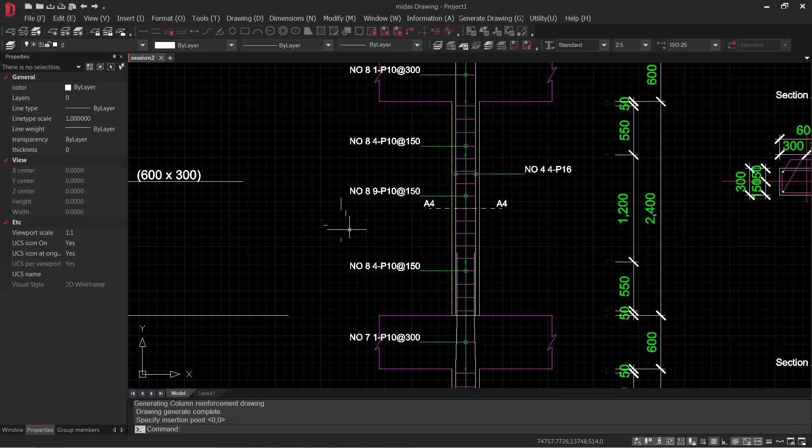After that, you can see the program will show the drawings generated. It will specify the diameter of bar and the spacings, and show a sectional view as well. So that's longitudinal reinforcement for the columns, and over here we can see the levels also specified.

Further, we can see here, this is for the beams. Sorry, this is for the columns itself. Let me go for the beams by going to generate rebar beams, check on, and then click on OK.

Okay, so just put it over here. This is the beam drawings, longitudinal reinforcement. The length is also specified over here. The number of rebars and the diameter of bar is specified. So this is for the bottom, and for the top reinforcement is what we can get.

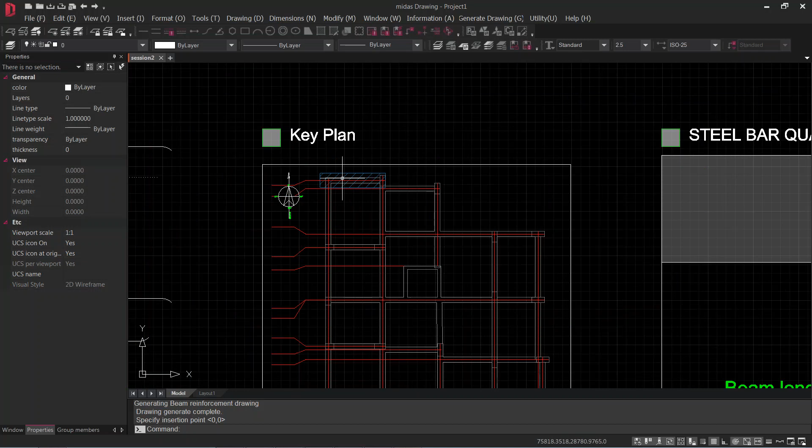We can actually see over here there's a key plan. It's pretty sophisticated — we can see which beam the drawing is actually talking about. So it is marking it and showing it. That's a good part.

Also we can see there is a rebar shapes or bar quantity table, or a beam rebar schedule, given by the program. The shape is given, and the rebar lengths are given, the diameter in the form of tables. So I think most of our work is completely taken care of by Midas nGen or Midas drawing software solution.

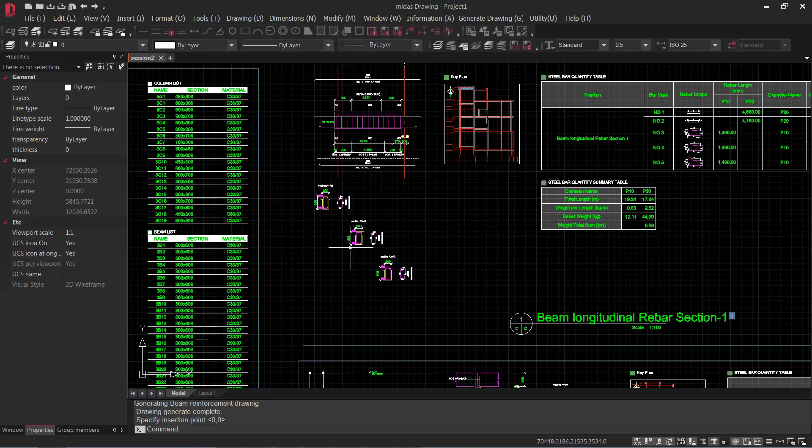And it's not just that — we can also make sections and elevations out of the plans we have generated. There is a structural section option over here. I'll give it a name as section 1, and press enter. Then I can specify a section cut over here. For example, I'm making a section cut from here to here, and I'll press spacebar, and I want to look at this side. So I'll just specify like this, and there we go.

We have got our section generated by the program. So this is a section that has been generated. We can see there is column and beam sections, and the levels are there. And at the same time, this section 1 is what we will see in the structural plan itself — section 1.

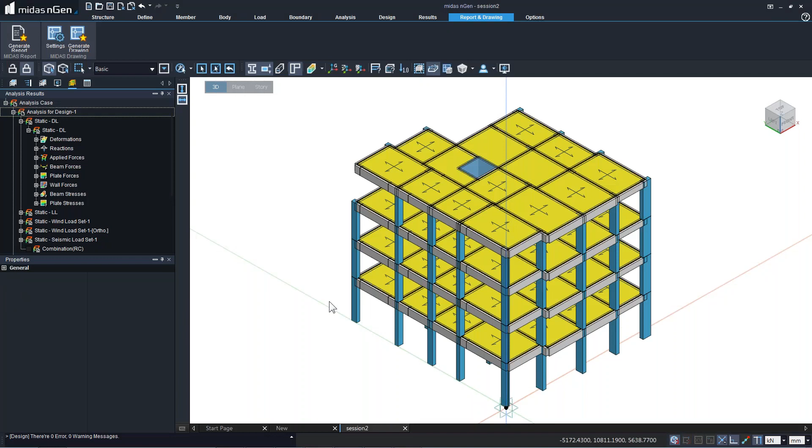So actually, once we get the hang of how to use these software solutions, it will be a matter of minutes to finish the entire project along with the drawings. So let me go back to Midas nGen software solutions. That's Midas nGen for us.

Lastly, last but not least, I would like to show another software solution, that is Midas Design Plus, which is a structural component solution. As per Eurocodes, there are several components that we can perform design of, as well as generate the drawings.

One more thing I would like to show in Midas drawing is that these drawings can be saved into a DWG file, exported into a DWG file, which we can further use to make changes or do additions, or give it to the draftsman.

And second part is about the bill of material. Midas nGen is also capable of providing or generating the bill of material. We can choose what all information we would like to get, and the program will automatically generate an Excel sheet. So while that Excel sheet is being generated, let me go to the Design Plus software solution and show you what all structural components are available for performing the design.

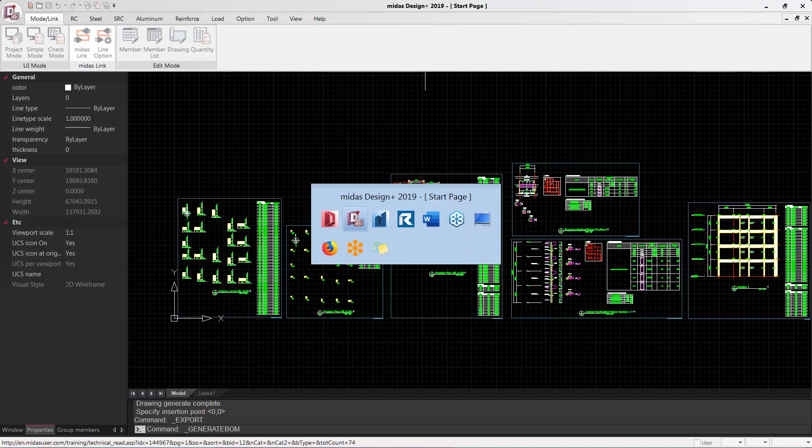So let me change the code. This is American Standard. As per American Standard, there are many structural components available. However, when it comes to Eurocodes, we have got a few of these sections.

As you can see, slab retrofitting, like FRP type of retrofitting of slab, can be done. Retrofitting of beams and separate beam design, retrofitting of columns and irregular columns can be done. Combined shear walls can be designed. Footings, isolated as well as strip footings, can be designed. When it comes to steel, let me change the code to Eurocode.

So when it comes to steel, there is steel beam and steel column design, as well as base plate design. Bolt connection and moment bolt connection design is also available.

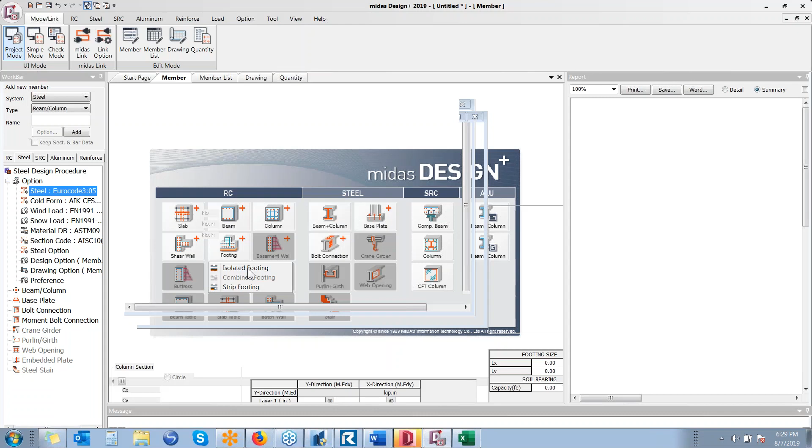Alright, so let me give you a small example of isolated footing in Midas nGen, Midas Design Plus software solution. Here we can simply specify things - let me get to the Excel sheet, and finish firstly with the member.

The design basically allows us to change the unit system to SI. Midas Design Plus software solution is very easy to use - all we have to do is specify the data. Right now I'll just give a preliminary example of information for performing the design.

Surcharge loading can be applied, and the height of the footing below the ground level can be specified in meters. We can have isolated mat or isolated pile footing design performed in Midas Design Plus. Eccentricities can also be applied.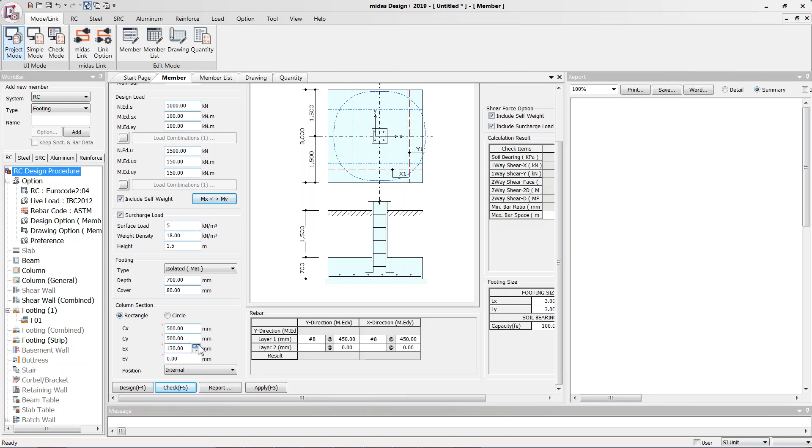So let me give an example for isolated mat, which can show the eccentricities very easily. You can see dynamically how the eccentricity is getting applied, in both X and Y direction. So eccentric footing design can also be performed, and you can specify the soil bearing capacity. I'll provide 300, and the footing size can be mentioned, and we can simply perform the design, wherein the program will automatically specify the diameter of bar and the spacings.

This diameter of bar is currently in ASTM standard. We can change it to BSEN, and the footings can go from P12 to P20, and we apply and perform the design again. So P20 is not good enough for our footing, so maybe we can try P25 and check.

So it's okay now - P25 overall is good enough, but still there is some failure in the soil bearing capacity, in one-way shear as well as two-way shear. So maybe increasing the size of the footing or the depth would be beneficial.

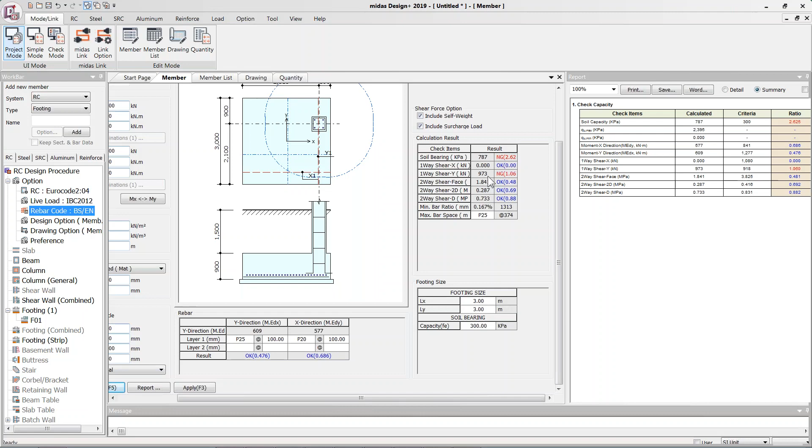So let's say the footing size is 900mm, and we can check it. It's passing for the two-way shear, but still one-way shear is failing. If I change the lengths and so on, we can go on modifying and checking. One-way shear is now passing, and similarly we can go on modifying further for passing all the check limits.

Over here we can see the information of the design calculated by the program, the design calculations done by the program, and we can get a Word file also generated for the report for this particular footing design.

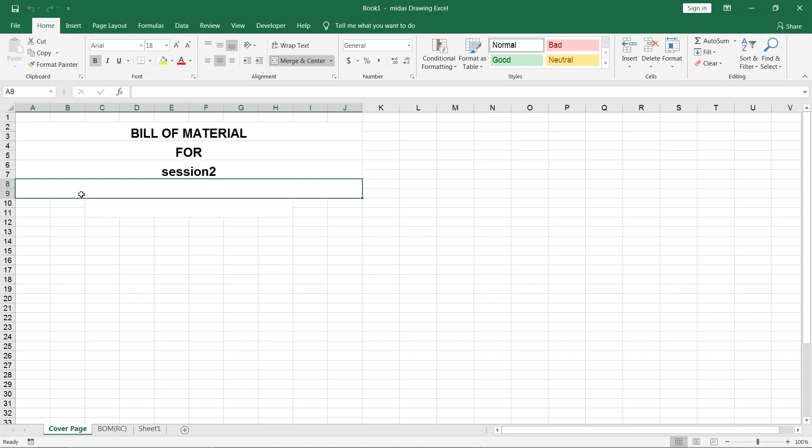Midas Design Plus is also capable of generating the drawings, and we can save those drawings into DWG or DXF files. Let me get you back to the report, the Excel sheet report generated by Midas, and the Midas drawing - the bill of material sheet.

So here we have the bill of material sheet for every member group, with section property, unit length, quantity, length given, concrete in meter cube, volume in meter cube, rebars in ton, and we can also see the formwork in area, in meter square. We can get all this information separately for beams, columns, slabs, and walls.

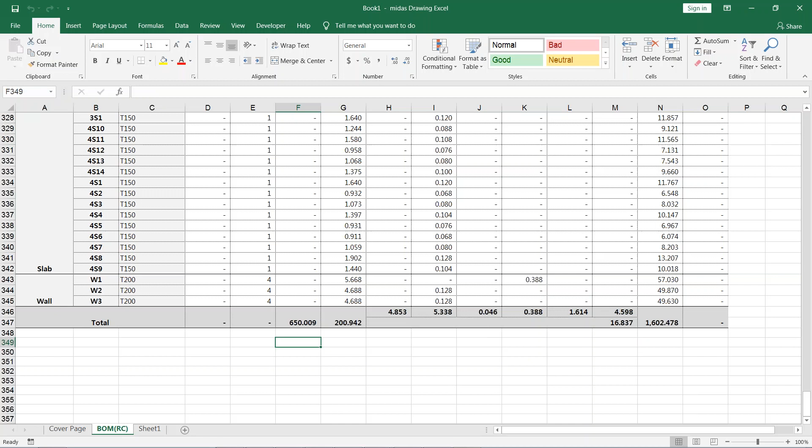And in the end we can get a summary which can be further used to get the ratios to help us understand what would be the basic quantity of our entire structure.

All right, so a report has been generated by Midas Design Plus for the footing design. We can see this is the drawing that has been generated, and we can see all the formulae that have been used by the program for performing the checks.

So moment capacity check and shear capacity check, one-way as well as two-way shear check, is performed by the program.

Let us look at the drawing generated by the program, by Midas Design Plus software solution. This is the eccentric footing. We can see what diameter of bar it is suggesting, the spacings, the length and depth of our footing, and also the cross-sectional view of our footing.

So that's about the footing design. Similarly, we have other types of designs which I mentioned earlier, and the program is also able to provide us with a quantity.

So I'll create the quantity over here - again concrete volume in meter cube, rebars in kilonewton, which we can modify to tons, so we can make it tonf. This is quantity per unit length, and this is quantity per unit area of the footing, and the total required, which can again be exported to Excel sheets and utilized further.

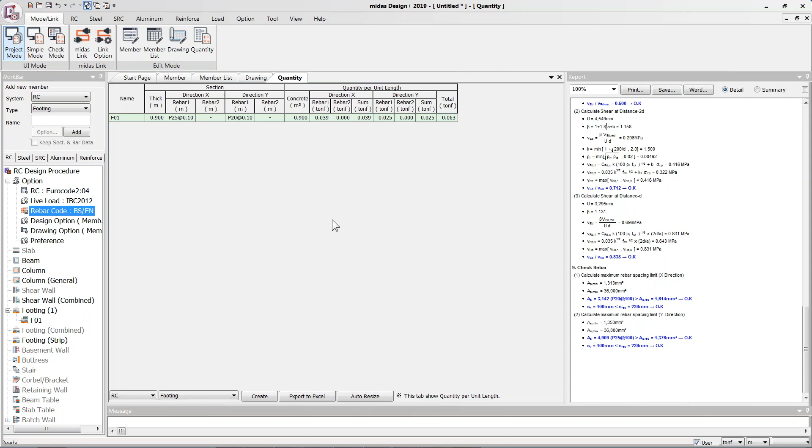So let me get back to our presentation now.

So I'll get back to our presentation, and we will have the summary of what all things we have seen in the demonstration.

Let's go through a summary of the strengths of Midas nGen software solution over Midas Gen. We have several automated features as compared to Midas Gen software solution. One of the features was the tracing file feature, in which we could simply create the section properties as well as the members directly using the architectural drawings.

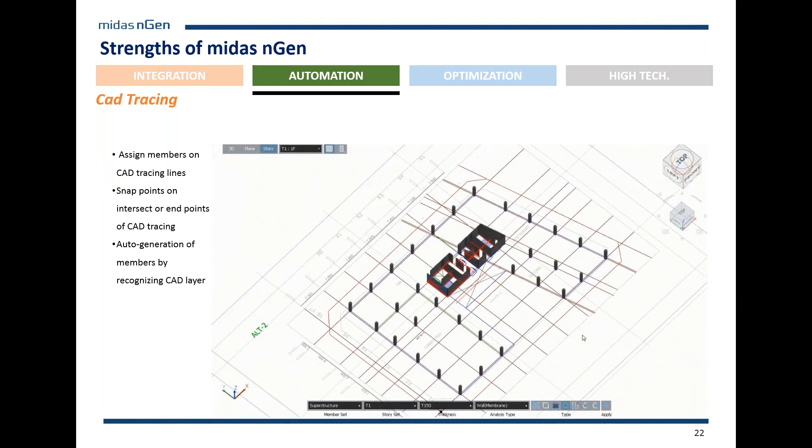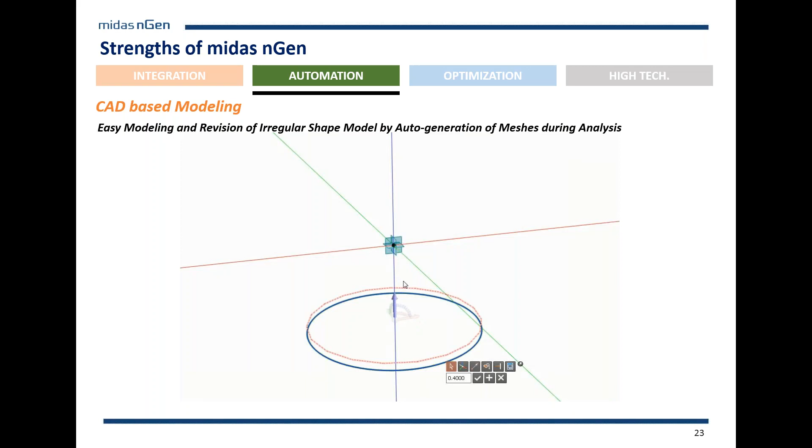Another feature is using sweeping tools and auto mesh feature. There are Boolean cut tools as well that are available, so complicated models can be easily done in Midas nGen software solution. We can see here how easily we could mesh, and we can also remesh the model by changing the size, so it's very convenient. No need to delete the mesh and remesh it, just directly change the size and perform.

Then in automation, we have got wind load application for enclosed structures as well as open structures, and for machine structures in addition to building type of structures in Midas nGen software solution. We have Eurocode as well as British Standard BS 6399 for wind load application. Seismic load is also available, and Eurocode is available in Midas nGen software solution.

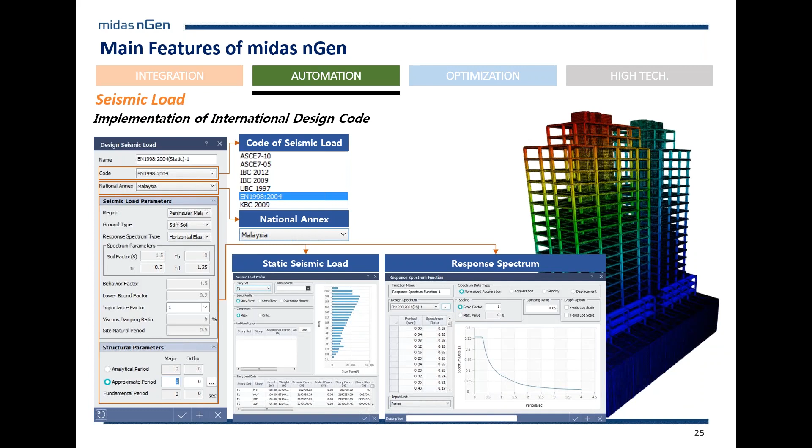Optimization, well, Midas Gen also has optimized design, however, Midas nGen is one step ahead of Midas Gen. In optimization, firstly, the design is available as per Eurocode and British Standard for steel as well as for RC. When it comes to optimization, we have optimization in case of RC structures as well, so the program is going to be placing rebars in an optimized way. Further, it is going to calculate the minimum reinforcement ratio for the most unfavorable member for each member group, calculate reinforcement in reference to the bars placement range settings by the section sizes that we have provided, and then perform various checks.

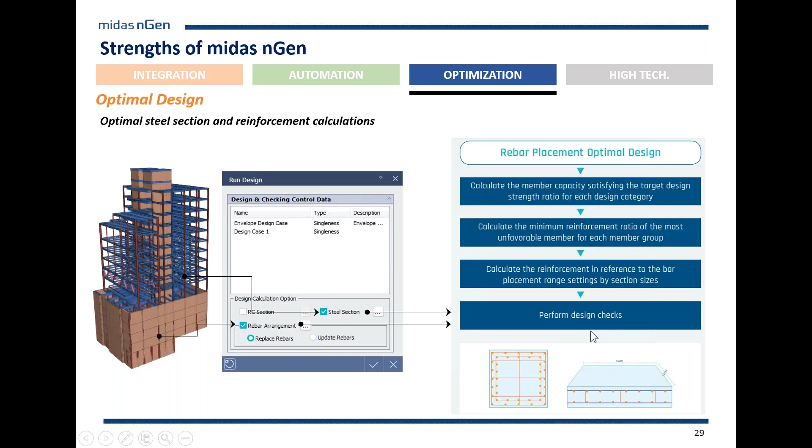So in Midas nGen, as compared to Midas Gen, we have first of all a Word file design report, and secondly we have additional designs. That is, we have design for irregular wall, design for slabs, conventional slabs, design for foundations, conventional foundation design, and there are stress checks and displacement checks available for slabs, beams, and stress check is for columns as well. So that is in addition to what Midas Gen gives in Midas nGen. Very sophisticated design reports are available with reference to the codes with sub-clause numbers, and we have also seen how a dynamic report maker is available in Midas nGen software solution.

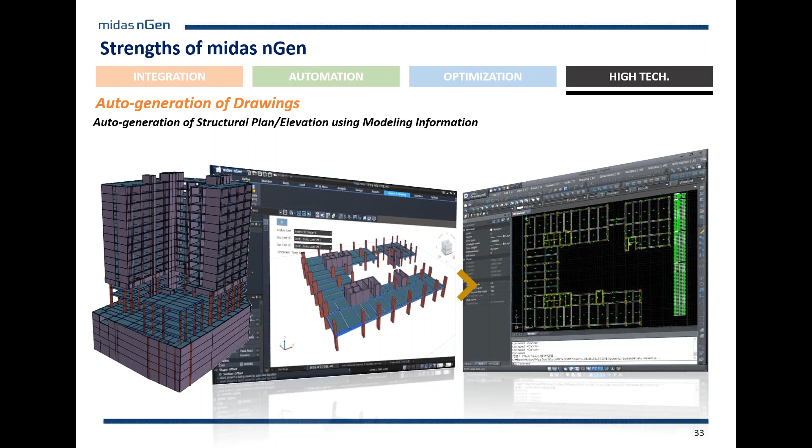Drawings also can be generated very easily and more in detail in Midas drawing from Midas nGen. And this is what we had seen actually, how the reports are made in Midas report maker.